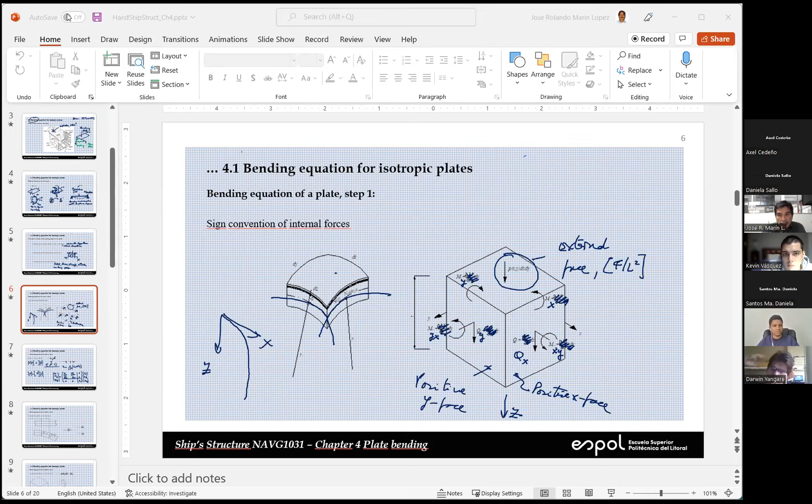I see that the first question, let me share the screen. Can you see my screen, people? Yes, doctor. Okay, so here, something which is very interesting is that the z-axis points downward, right? So when you say z equals plus t over 2, you can allow everybody to come in, Misayo, please.

Okay, when we say z equals plus t over 2, I put this question because it's easy to get confused, because usually we take positive upward. In this chapter, positive is downward. So when we say z is positive, that means this is the bottom face. So it's correct. Okay, the second question, when we say Mx is positive.

This is the convention that we're going to use. In this case, your thumb points in the positive y direction. So when you say that Mx is positive when your thumb is pointing in the negative y direction, that is incorrect. It's thumb in the positive y direction.

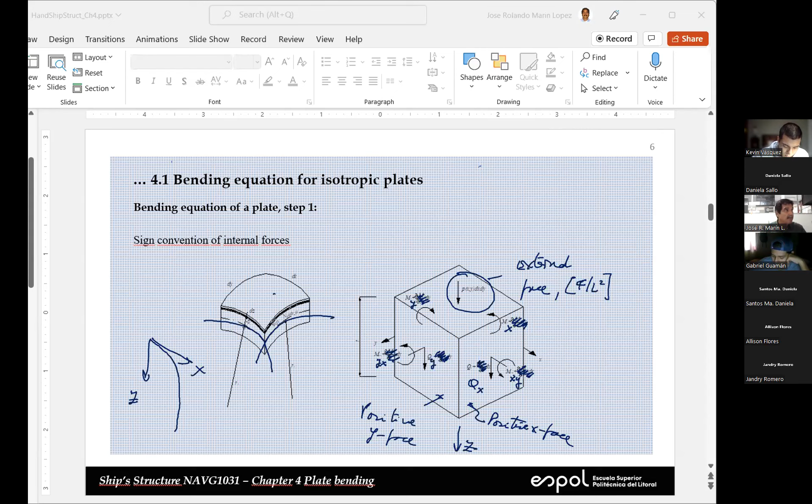We're going to present just a summary because you have the material as a video. Can you see my screen, Miss Ayo? Yes. Full screen? Yes. Okay, good. So as I suggested, Miss Ayo yesterday prepared a new version of this figure, okay? And I'll try to post it so you can have it more clearly.

So this is Mx, this is My, this is the X-axis, Y-axis, and the Z-axis points downward. These are positive faces, and these are the positive directions of the internal forces. So we have shear force, but in two faces, so we have two different shear forces. Similarly for the bending moments. And also in this case, we have torsional moments. You see, this is Mxy, and this is Myx.

This is the external force, and the external forces are expressed using the global reference system, okay? Remember, internal forces are referred to the positive or negative faces. External forces are referred to the reference system. That's something that we have said many times.

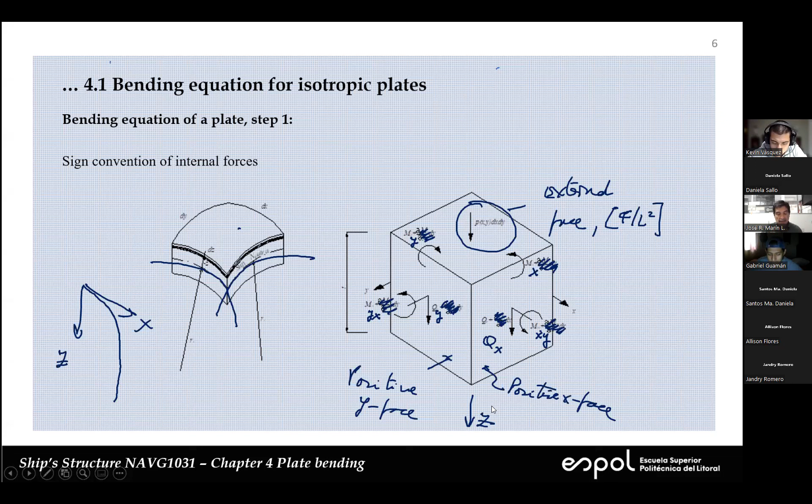Again, this is something that you discussed in solid mechanics, right? But the problem is that up to now, basically, we have worked with one single sigma x component of the stress tensor. Now, in this chapter, we need three, even though in general we are interested only in two, sigma x and sigma y. So from this point on, if you say stress or normal stress, that's not enough. You have to specify the subindex because we have different values in different directions. So be careful with that.

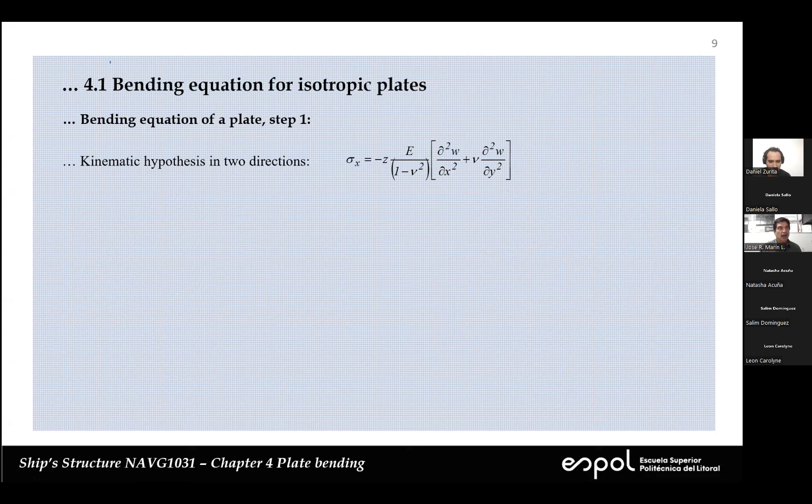U, V, W. What is this W, Mr. Zurita? Are you listening to me, Mr. Zurita? W. Yes, doctor, good morning. W, the derivation. W, come on, people. What is W here? Deflection. The deflection, yes, the vertical deflection.

Okay, so let's go back now here. What are the units of the second derivative of W with respect to X? Mr. Gomez, what are the units of the second derivative of W with respect to X? Mr. Gomez? Yes, doctor. Dimensional. No. The first derivative is the non-dimensional. The moment. No. Let me go to somebody else.

Mr. Chin Chin, what are the units of the second derivative? 1 over length. Yes, 1 over length. So you multiply 1 over length times D, which according to Mr. Dominguez has units of FL. The result is force. And that's the unit of bending moment, total bending moment per unit width. Okay, so that's something that we always have to be aware.

Okay, so finally, we make this replacement and we have this. Bending moment is equal to minus D and all of that. And we can deduce something similar for the bending moment in the Y direction. So My is going to be minus D times the second derivative of W with respect to Y, etc. So that's part of what we have to take in the first step. We are relating bending moment with curvature. Now, what we have to do is do something similar with the torsional moment. That's what we're going to do next.

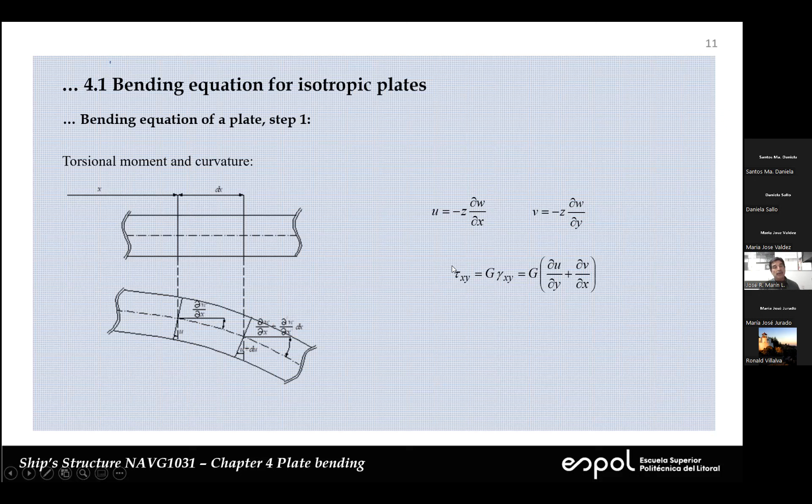Now, we can replace this in here and that in here, and we're gonna get an expression for tau xy, and this is what we have here. So we can assume that we can interchange the order of differentiation, and that's what we obtain. So the second derivative of W with respect to X and with respect to Y, it's like a curvature in the shear sense.

Now, units of G, Miss Aviles. What are units of G here? Yes, doctor. The units of G. Go on. It's force over length squared. Yes. Now here I have that multiplied by Z, that's length. And second derivative, the units of this is 1 over length. So these two cancel. So the units are force divided by length squared. That's stress, right? Now we have to integrate this in order to obtain the torsional moment. That's what we do next.

Similarly with what we did in the case of normal stress, this expression is the result of an assumption. And the assumption is that this moves and rotates, but keeps straight. It is an assumption. And this expression is the result of that assumption. We can assume anything, but integrating this shear stress, we have to recuperate the torsional moment. That's what we're going to do.

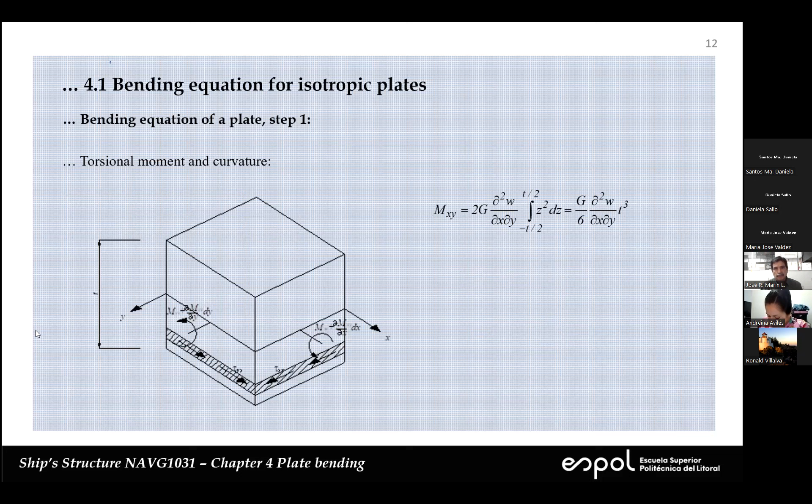Okay, so we see here that this is the shear stress, tau xy, will multiply by this area. And we see that we are going in this direction, which is the opposite to the direction of our sign convention. But we have another negative here. So we combine these two negatives, that's why we have a positive here. And again, we can integrate, and this is the result.

Okay, so units are: the second derivative is 1 over length. This is length cubed. So the result of this is length squared multiplied by G with units of force over length squared. The result is force. And remember, this is torsional moment per unit width, okay? We are just forgetting about the per unit width. We just call it torsional moment, but we have to keep it in our memory. Please put it in your memory. Every internal force in plate theory is expressed as per unit width, okay?

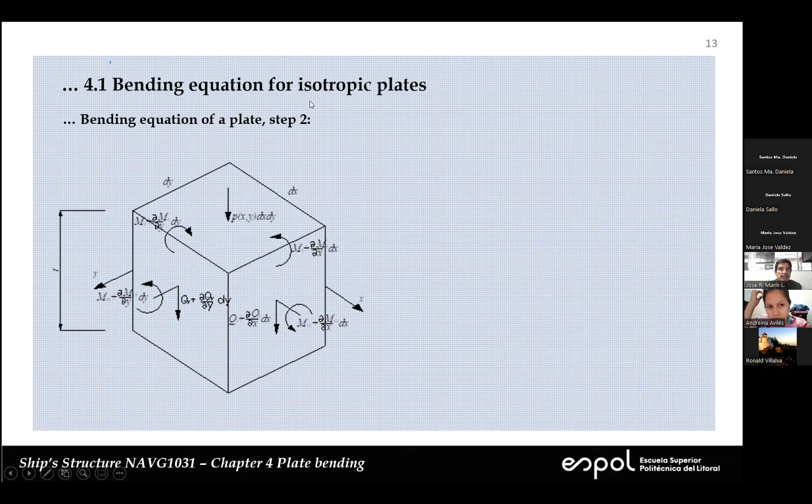And you see here that this is step 2. Step 2 is to express the equilibrium. So this is the system. This is the one face. And when we move from here to there, you have this change. Similarly for all the other forces. So we have 3 equations: summation of forces in the Z direction, summation of moments in the X, summation of moments in the Y direction. With these 3 equations, we're going to get one single equation to combine bending moments and torsional moments. That's what we're going to do.

So we say summation of forces in the Z direction. Remember, positive Z points downward. Be careful, positive Z downward. So we have shear force on the negative face, but we have multiplied by dy. Why? Because remember, every internal force in this chapter is expressed per unit width. So we multiply this times the width. The width is dy. Similarly, for the other face here, multiply by dx. And then on these sides, here and here, we have this and we have that.

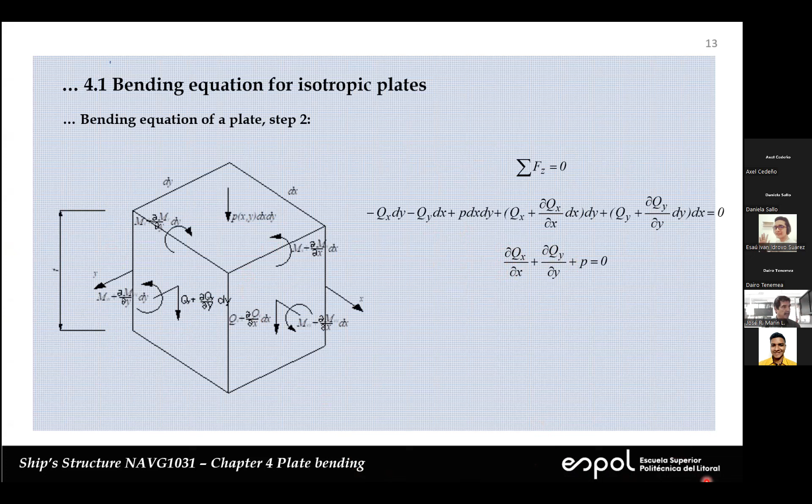Okay. That's that. So from here we get Qy. From here we get Qx, and replace in the first equation, which includes the first derivative of shear forces. That's that.

Again, who has not participated? Mr. Pesantes, do you remember the equivalent equation in the case of the beam theory? Mr. Pesantes? Yes, doctor. Is the second derivative of the moment equal to... You shouldn't doubt up to this point. Come on. The slope? No.

No. Mr. Villalva, do you remember the equivalent equation in the case of beam theory? Equal to P of x. I'm sorry, could you repeat that, please? Because I didn't get it. It's equal to P of x. Yes, the second derivative of the bending moment is equal to P of x.

And in what case could you apply this equation, the second derivative of the moment equal to P of x, to solve what type of problem? Mr. Quimi, Andres Quimi, what type of problems can you solve with that equation? Mr. Quimi.

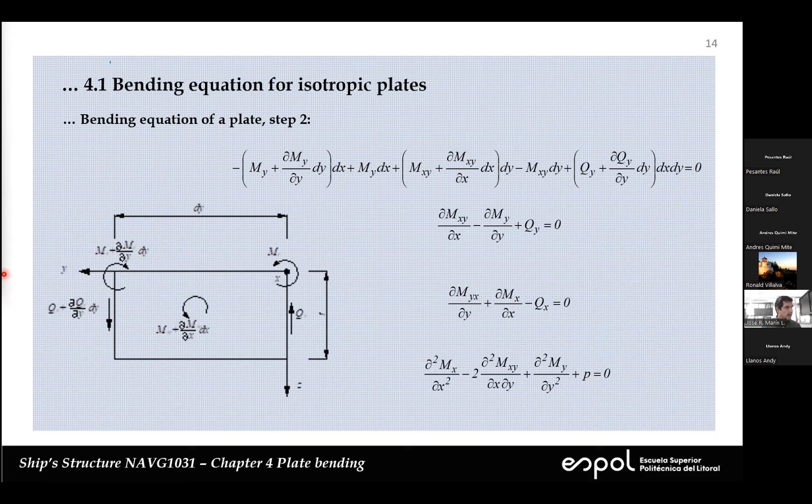And this is the result. Okay, that's the third step. So this is what we have so far. These are the relations between the bending moment, the curvature, torsional moment, and curvature. And this is the relation from step 2. This is equilibrium. So what we do is we take this and put it in here, this, put it into there. Similarly for the bending moment, and we just simplify, and this is what we obtain. So this is the equation that we're going to use in order to analyze plate bending problems, okay?

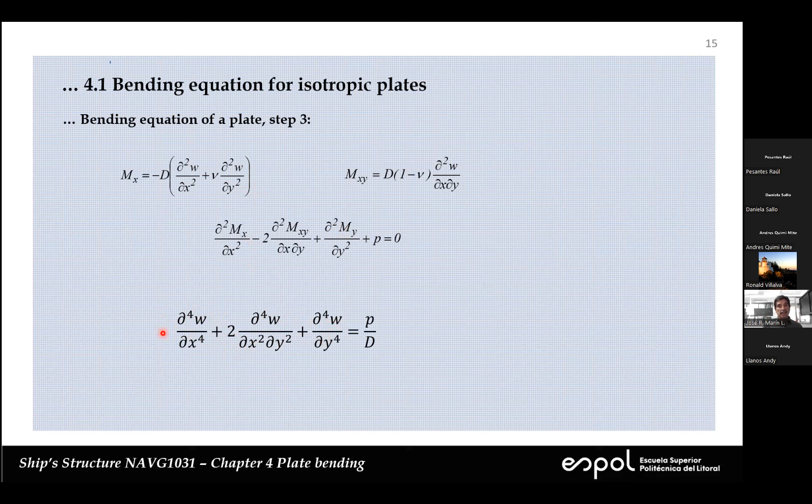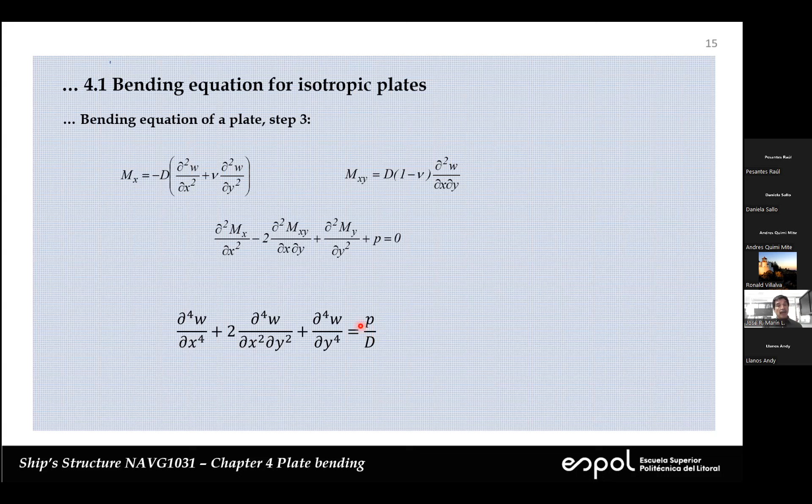So this is a fourth order. You see that the coefficient here is 1, here is 2, here is another 1. So all of these coefficients are constant. This is a non-homogeneous problem. You see that on the right-hand side, we have something which is different than 0, okay? These are the characteristics that we have to highlight. So this is something that we warned at the beginning of this chapter. It's going to be partial. Everything's going to be partial derivatives.

Linear. It's very important to recognize that this is a linear problem, because what we're going to be doing is try to build solutions for simple situations and then combine them in order to prepare solutions for more complex loading conditions. You will see that. Constant coefficients, okay? So if we have linear and constant coefficients, that usually means that exponential functions are going to be part of the solution. Remember that if we use an exponential and the exponent is an imaginary term, you can have sine or cosine terms. Don't worry, we're not going to work with imaginary things here. In the next semester, yes, in vibrations, not here.

Or if you have a real exponent, you can express it using hyperbolic sine or hyperbolic cosine functions, okay? And that's from the fact that we have recognized that this equation is linear and with constant coefficients. Fourth order, that means that we need to specify 2 boundary conditions for every point. Please be careful because in this case, we don't have 2 points. We have borders, we have edges. And in every point of an edge, we have to have 2 boundary conditions. Not more, not less, exactly 2. And finally, it's not homogeneous, okay?

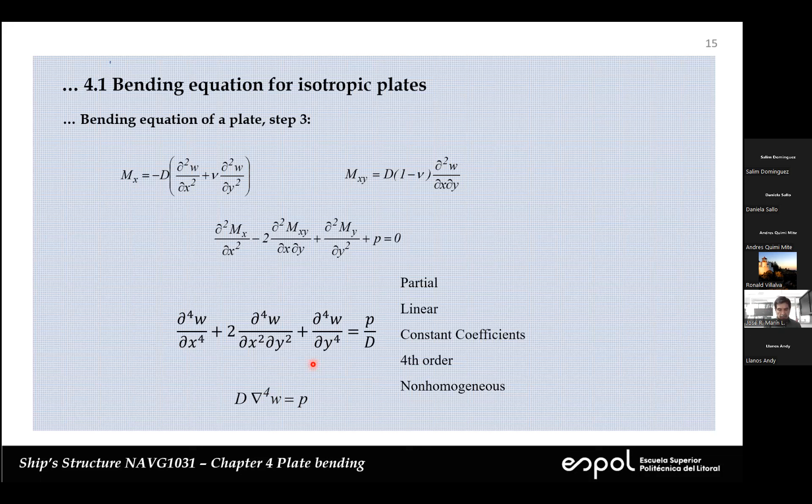What's the relation between sigma and the bending moment in the case of the beam, Mr. Chiriboga? Mr. Chiriboga, what's the relationship between the bending moment and the normal stress in the case of the beam?

No? It's not here, Mr. Chiriboga. Okay, let's see who has not participated yet. Mr. Benavides, help me, help me. Good morning, doctor. In beam, it's only the moment. Come on, Mr. Benavides. What's the relationship between the normal stress and the bending moment? Miss Puertas, help him. Miss Puertas, please help him. Yes. Teacher, can you repeat the question, please? No, I'm not going to repeat the question. Miss Santos, help them.